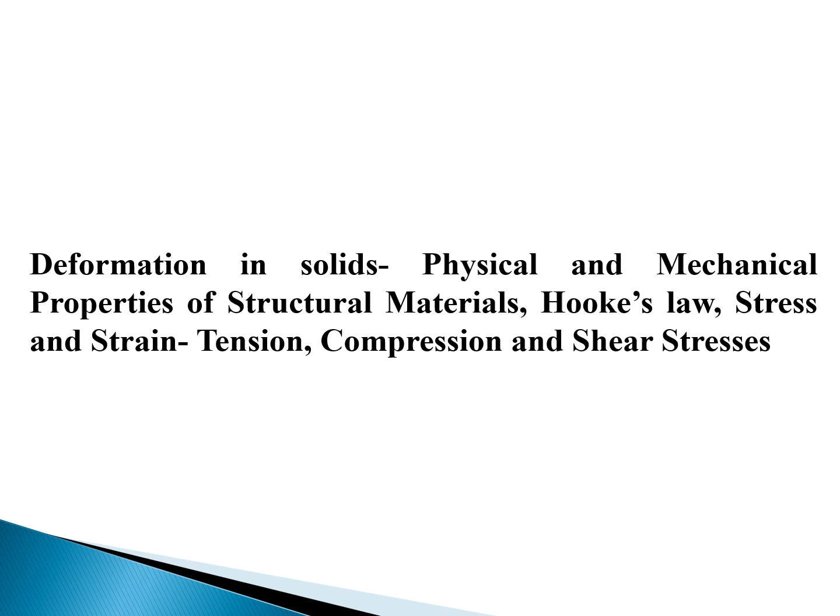In this chapter, we will discuss deformation in solids, physical and mechanical properties of structural materials, Hooke's law, stress and strain, tension, compression, and shear stresses. An engineer must know the required properties for his products. Various properties of materials may be grouped into A, physical properties, and B, mechanical properties.

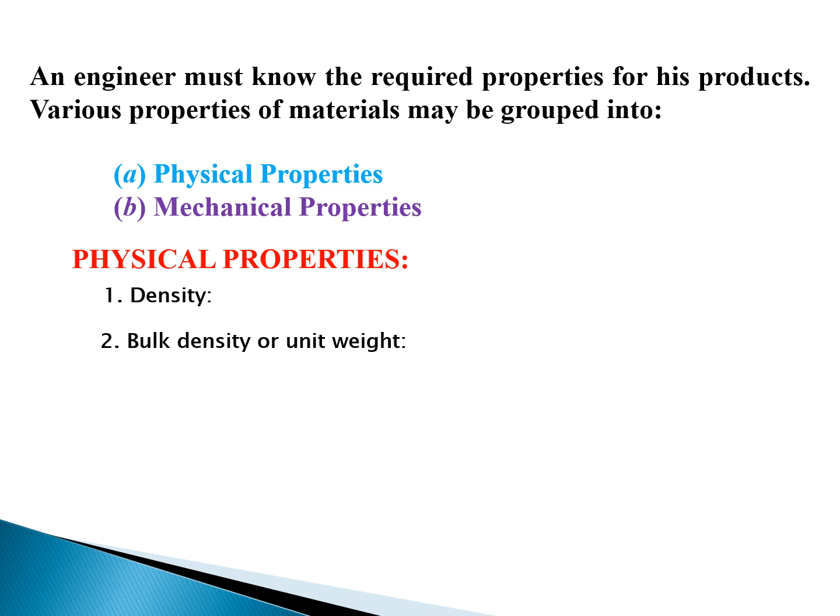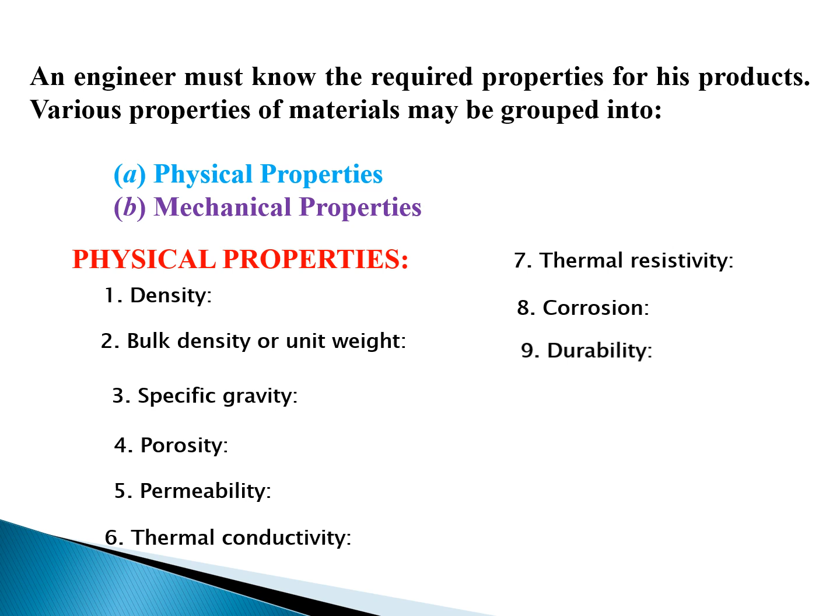Now, physical properties: number 1, density, the bulk density or unit weight, specific gravity and porosity, permeability and thermal conductivity. Seventh one is thermal resistivity. Next one is corrosion, durability and chemical resistivity.

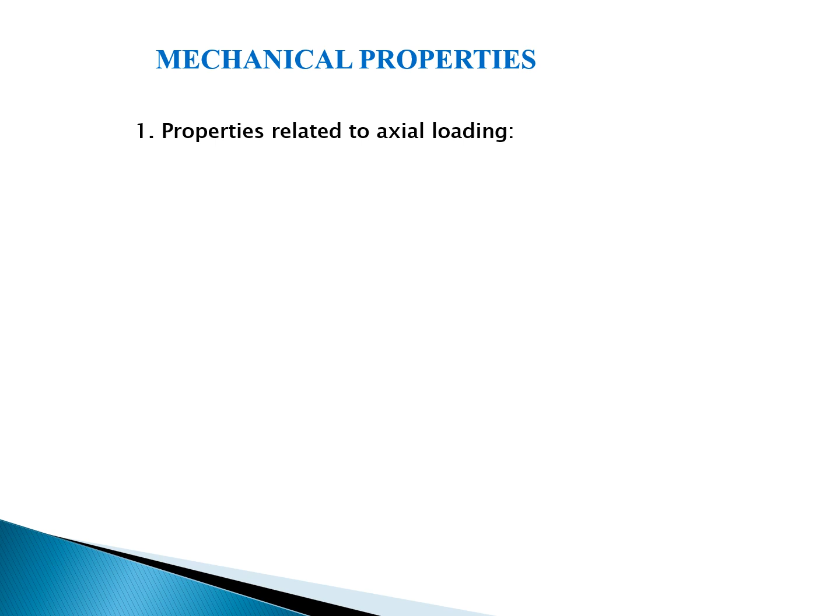Next, the mechanical properties. What are the mechanical properties? Number 1, properties related to axial loading. In axial loading, the load may be tensile load or compressive load. In the case of tensile loading, the strength is the tensile strength. So what is tensile strength?

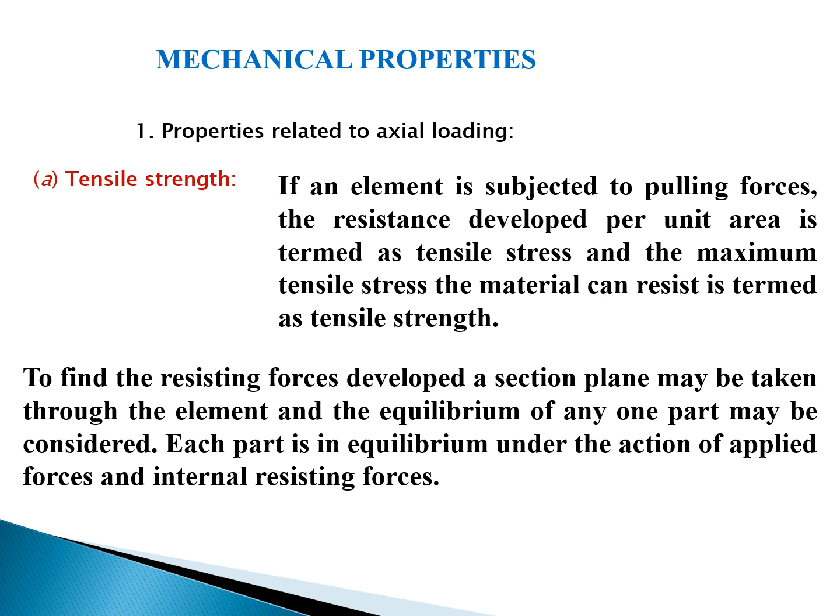If an element is subjected to a pulling force, the resistance developed per unit area is termed as tensile stress, and the maximum tensile stress the material can resist is termed as tensile strength. To find the resisting forces developed, a section plane may be taken through the element and the equilibrium of any one part may be considered. Each part is in equilibrium under the action of applied forces and internal resisting forces.

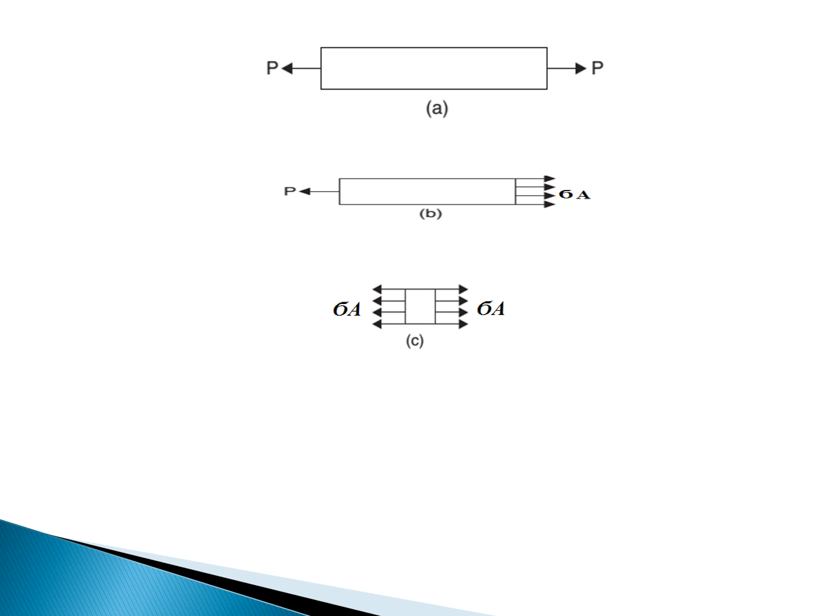Now let us discuss this slide. Picture A shows a pulling force P applied on an element, and picture B shows the section, with sigma A on the right hand part, and similarly sigma A on the other. So the total force on this element is sigma into A. Sigma here is the tensile stress.

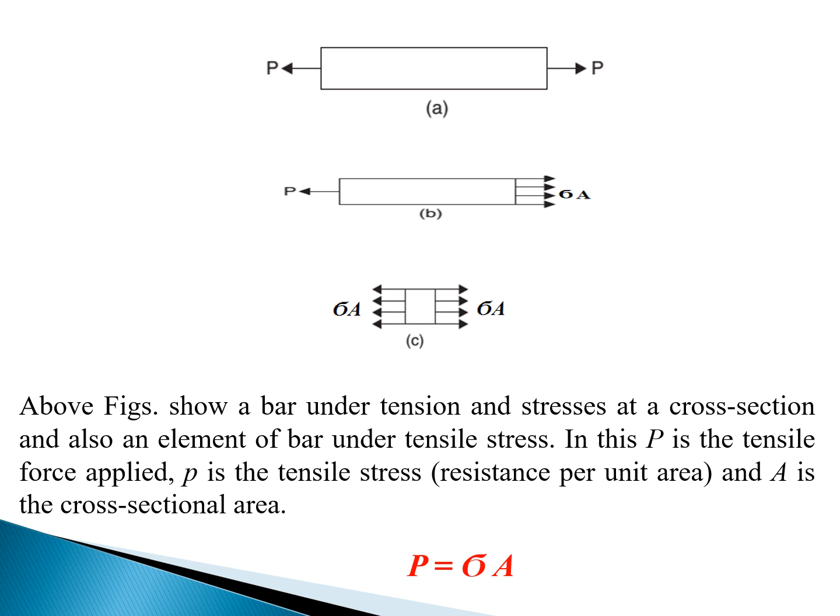The figure shows the bar under tension and stresses at a cross section, and also an element of the bar under tensile stress. P is the tensile force, small p is the tensile stress, that is sigma, the resistance per unit area, and A is the cross sectional area. Tensile stress is denoted by the symbol sigma or small p. So finally capital P equals tensile stress sigma into A.

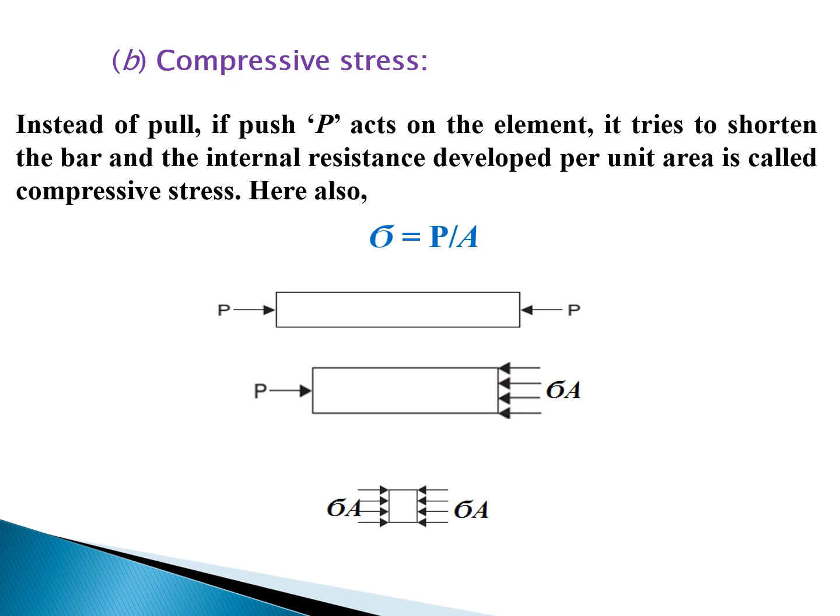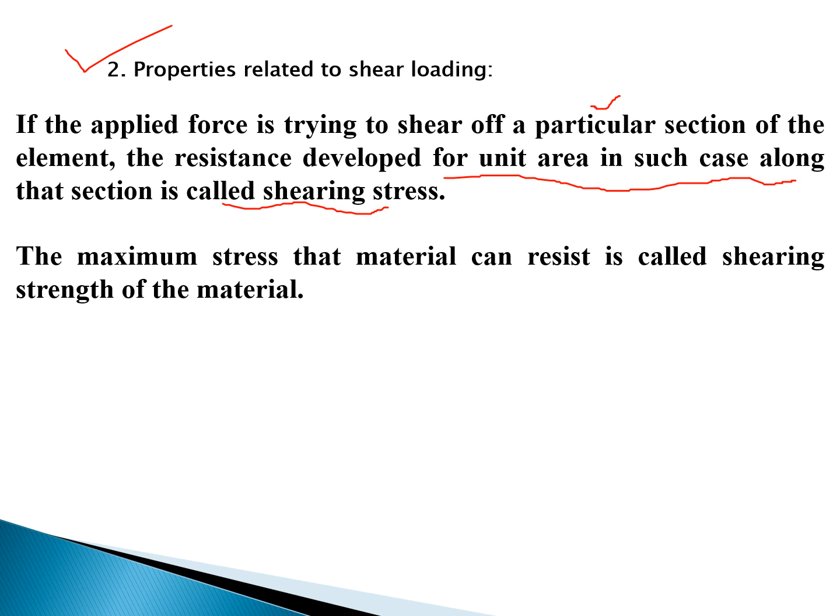Now if the applied force is trying to shear off a particular section of the element, the resistance developed per unit area along the section is called the shearing stress. The maximum stress that the material can resist is called the shearing strength of the material. This picture clears the view.

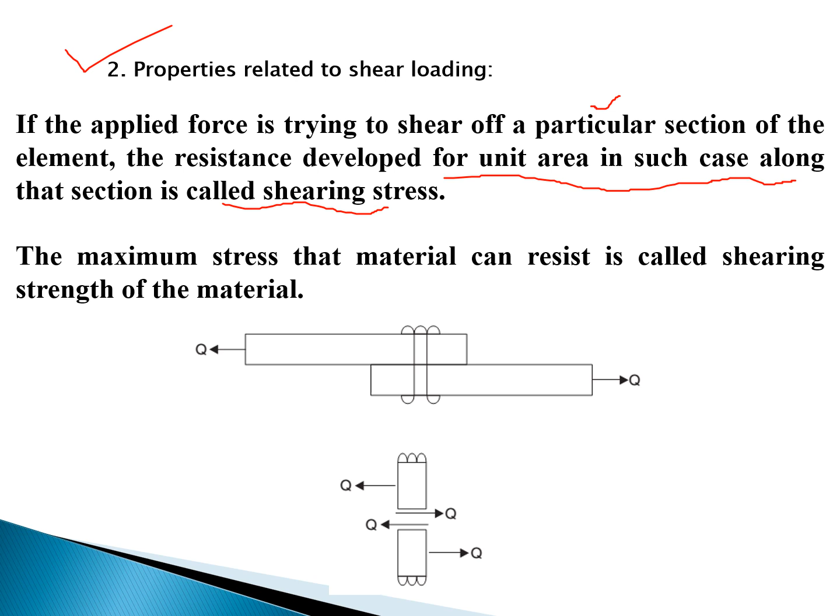Here Q is the shearing force. If Q is the shear force and tau is the shear stress, then the equilibrium condition of any part considered shows that Q equals tau A, where A is the cross-sectional area of the bolt, and tau, the shear stress, equals Q by A.

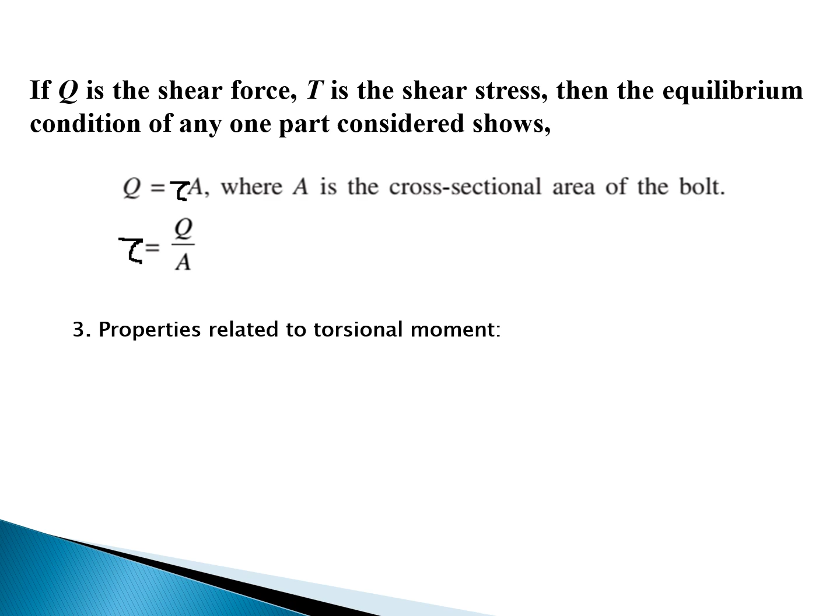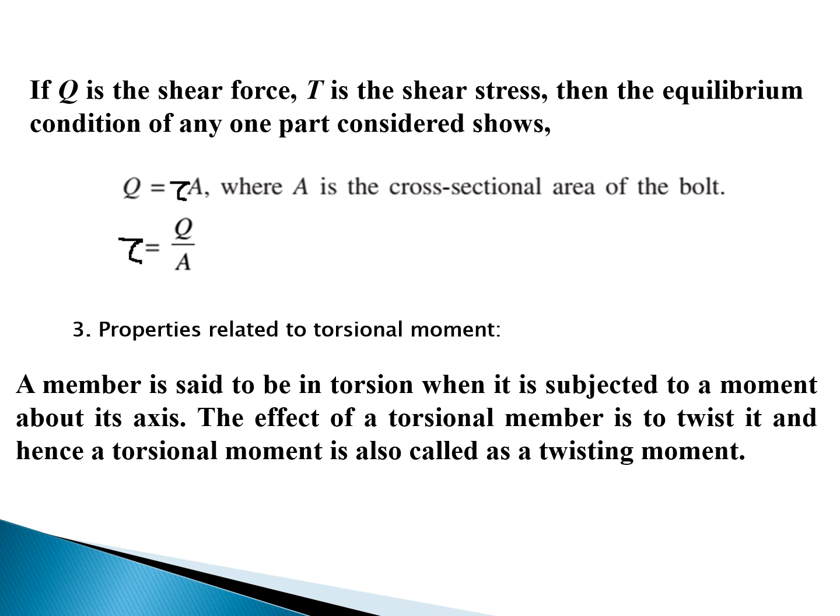The next one is properties related to torsional moment. A member is said to be in torsion when it is subjected to a moment about its axis. The effect of a torsional moment is to twist the member, and hence a torsional moment is also called the twisting moment. In this diagram, the torsional moment is called torque, denoted by the symbol T.

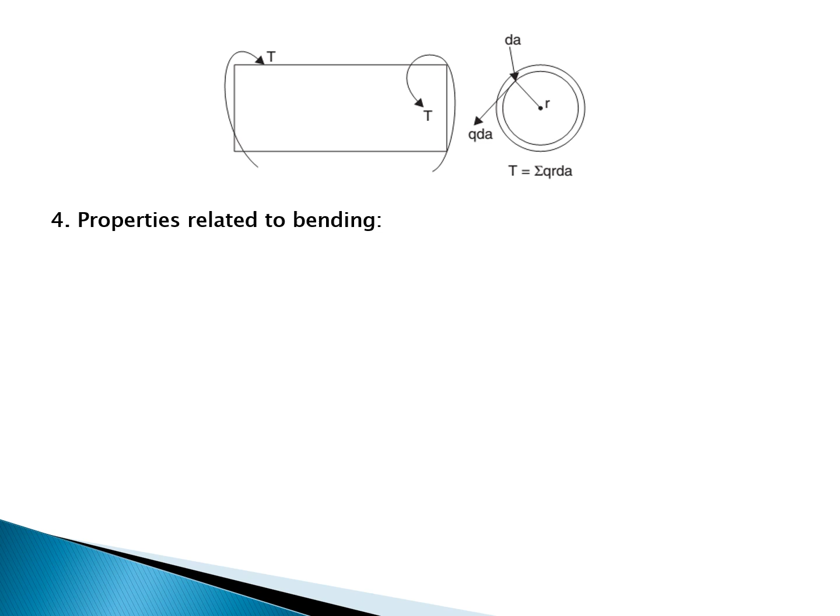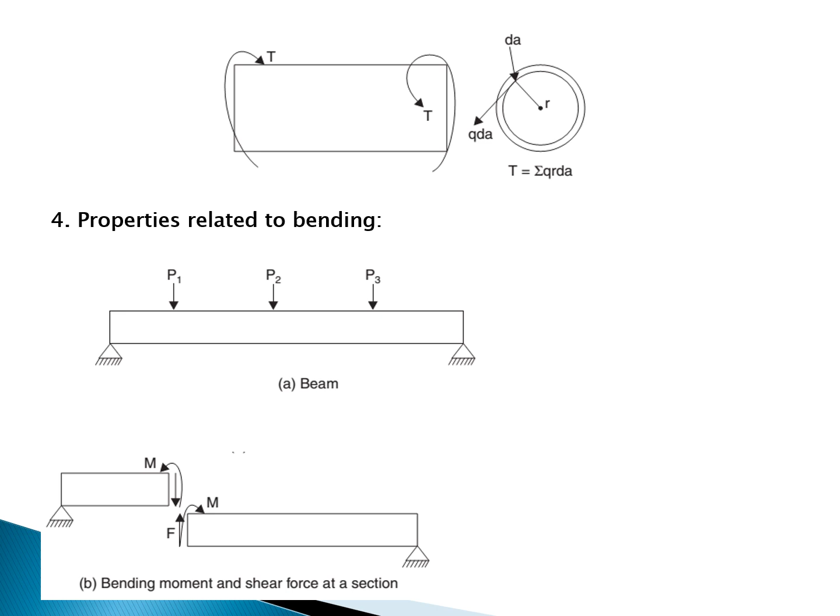Next, properties related to bending. In this diagram, different point loads are applied on a beam. This is the bending, and bending moment and shear force are in diagram B. Now in the case of resistance to shear, there are two arrows, one up and another down. That is the shear force.

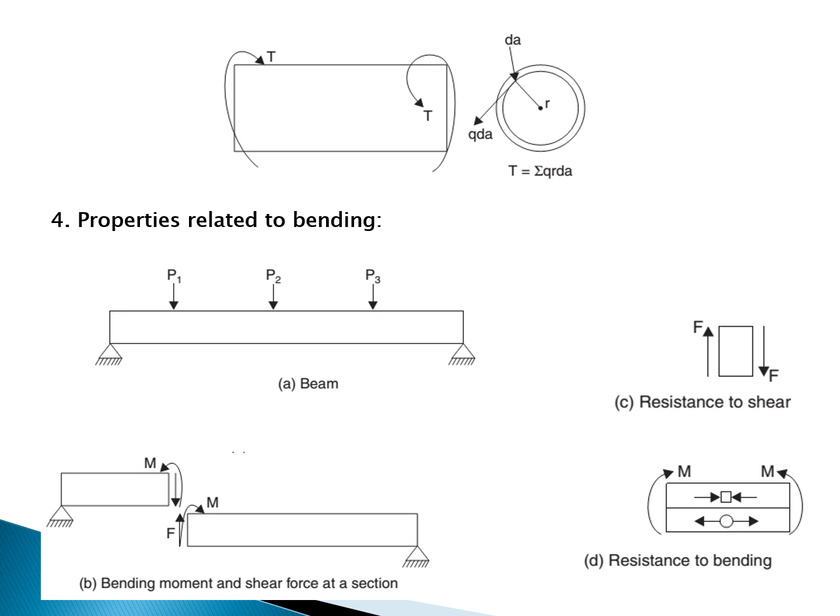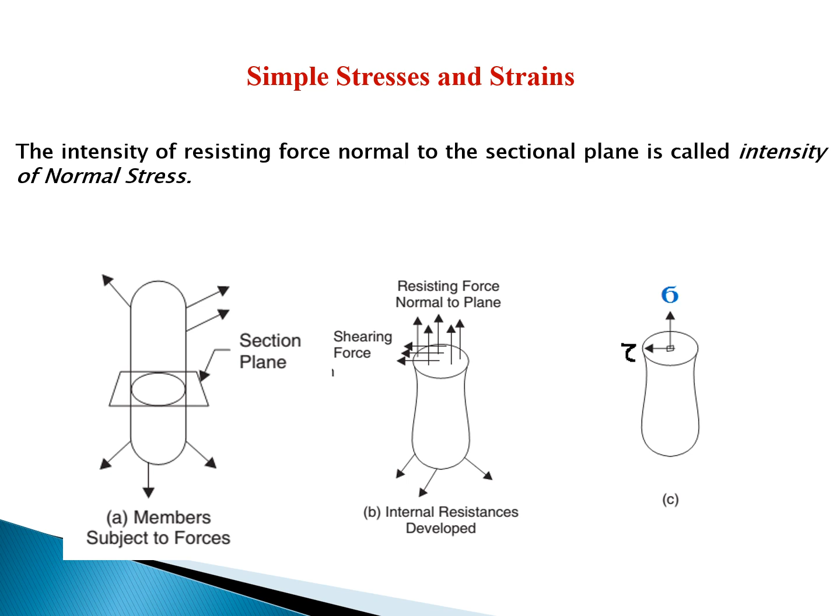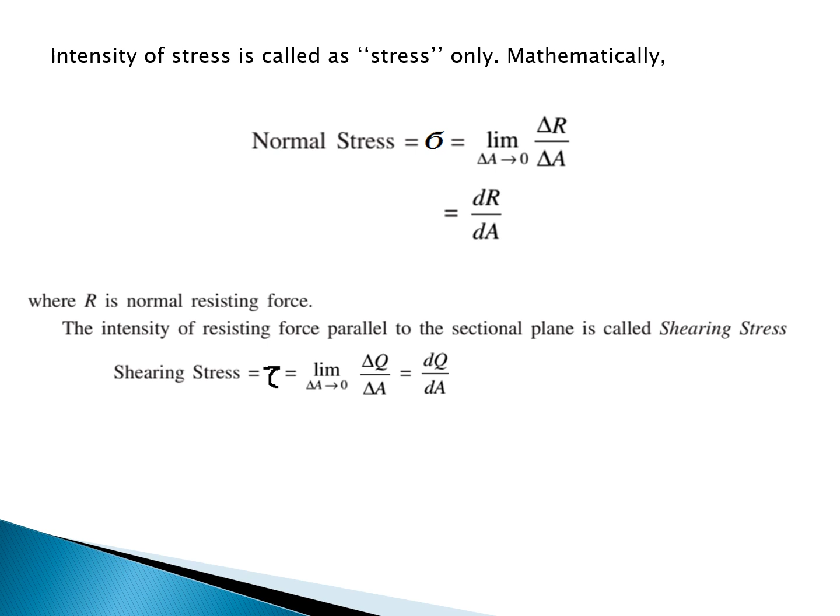Now intensity of stress is simply called stress. So mathematically we can express that sigma equals limit del R by del A, and finally dR by dA, where R is the normal resisting force. The intensity of resisting force parallel to the sectional plane is called the shearing stress. So shear stress can be defined as tau equals dQ by dA, where Q is the shearing resistance.

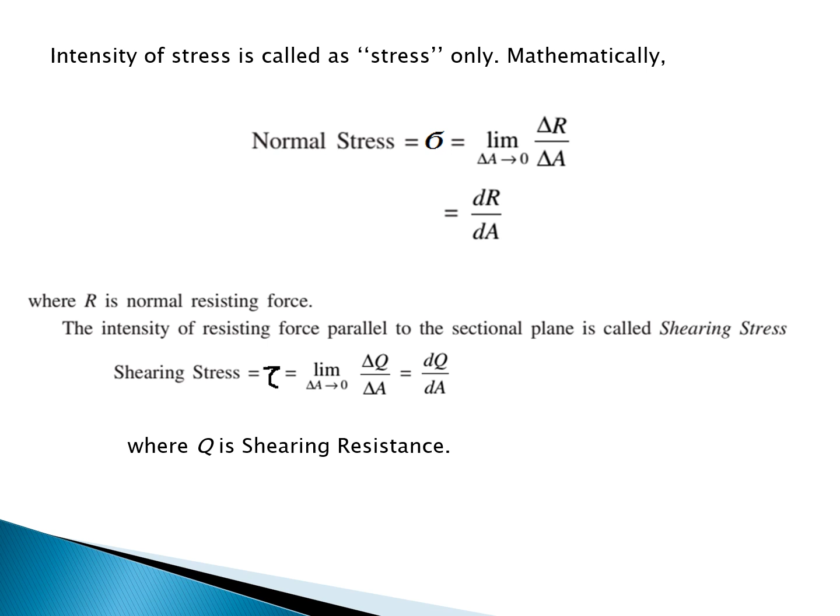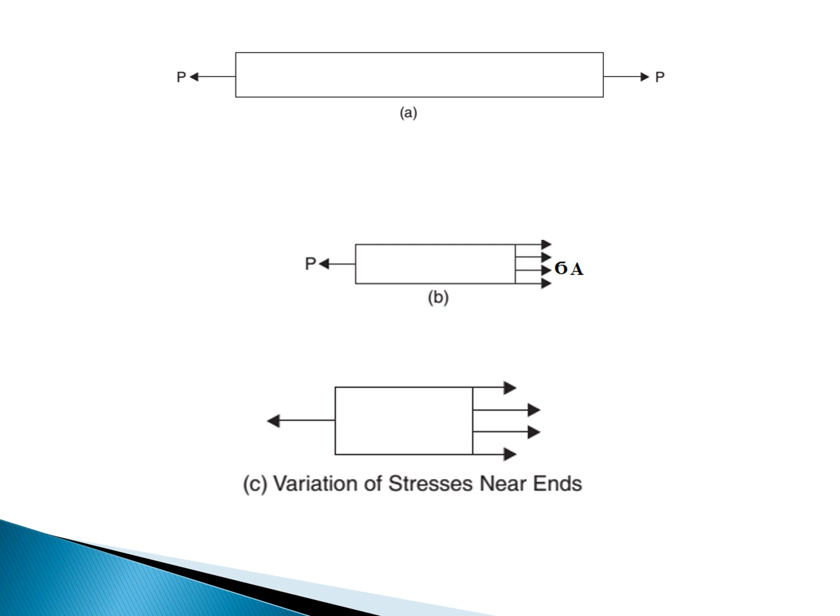Now next question comes, what is the unit of stress? Unit of stress will normally be Newton per millimeter square. The other derived units used in practice are kilonewton per millimeter square, Newton per meter square, kilonewton per meter square, or meganewton per meter square. The stress of 1 Newton per meter square is known as Pascal and is represented by Pa. That means Pascal is nothing but Newton per meter square.

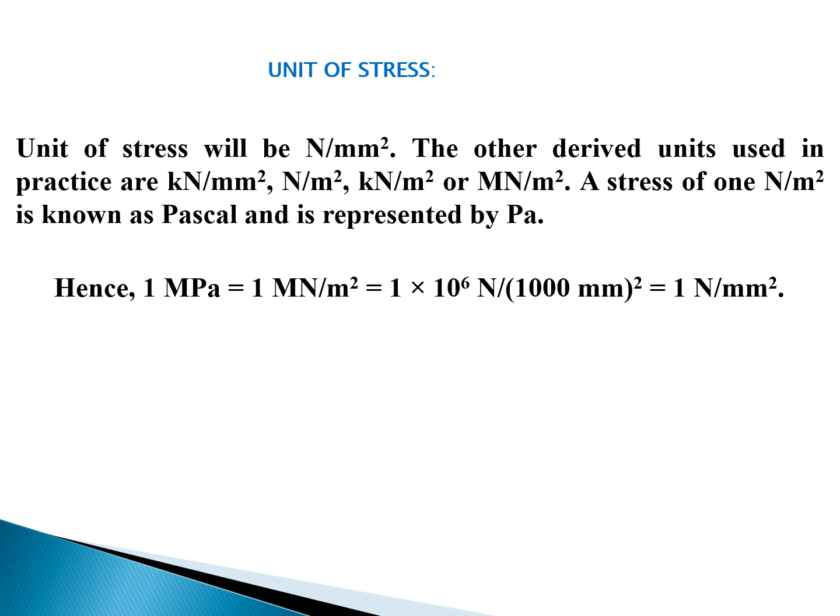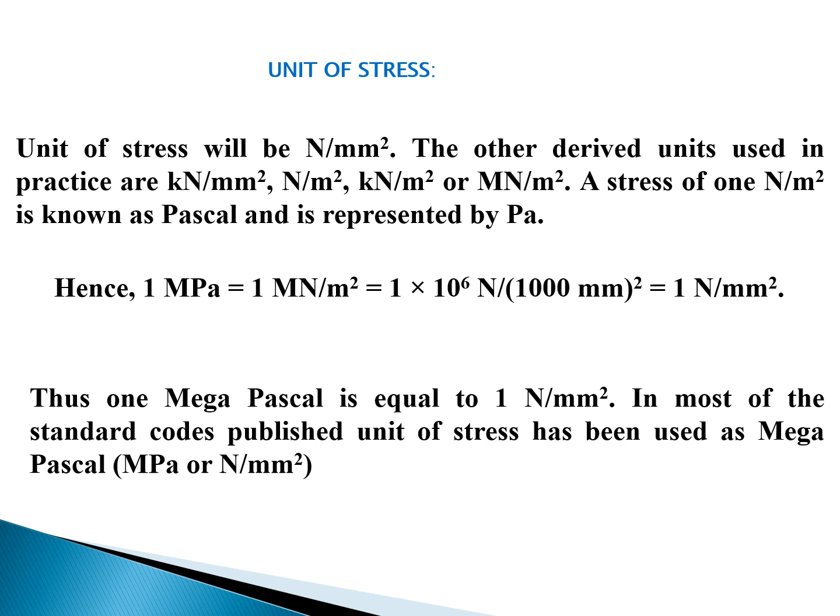So this is the conversion. So 1 megapascal equals 1 meganewton per meter square equals 1 into 10 to the power 6 Newton per 1000 millimeter square, finally 1 Newton per millimeter square. Thus 1 megapascal is equal to 1 Newton per millimeter square. In most of the standard codes published, unit of stress has been used as megapascal, that is MPa, or Newton per millimeter square.

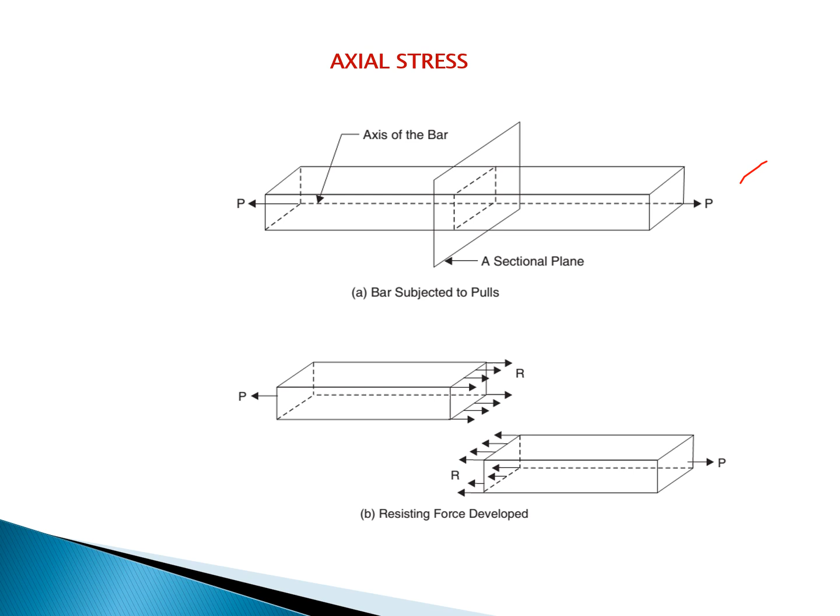Now the axial stress. So if you see the diagram, the axial stress is nothing but the stress acting along its axis. Figure A, the bar subjected to pull. Figure B, that is the resisting force developed. So this is especially for the tensile stress.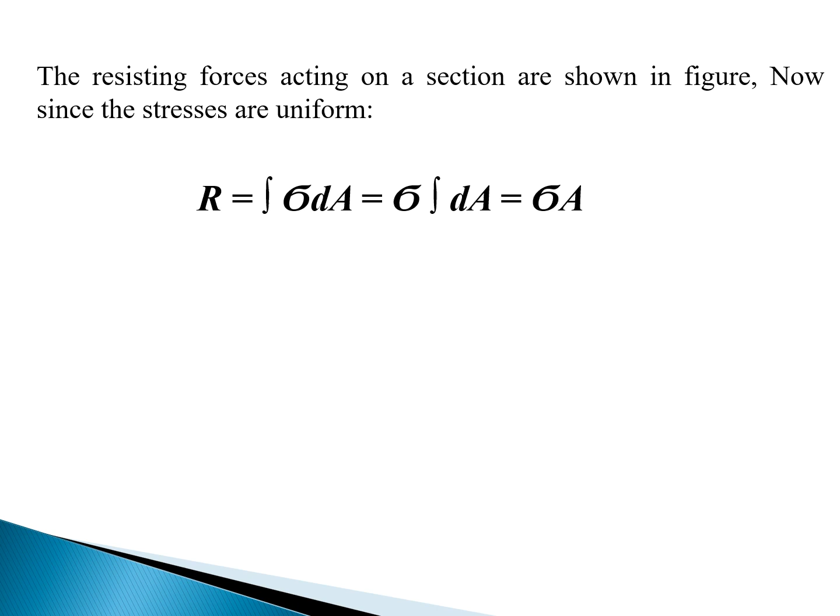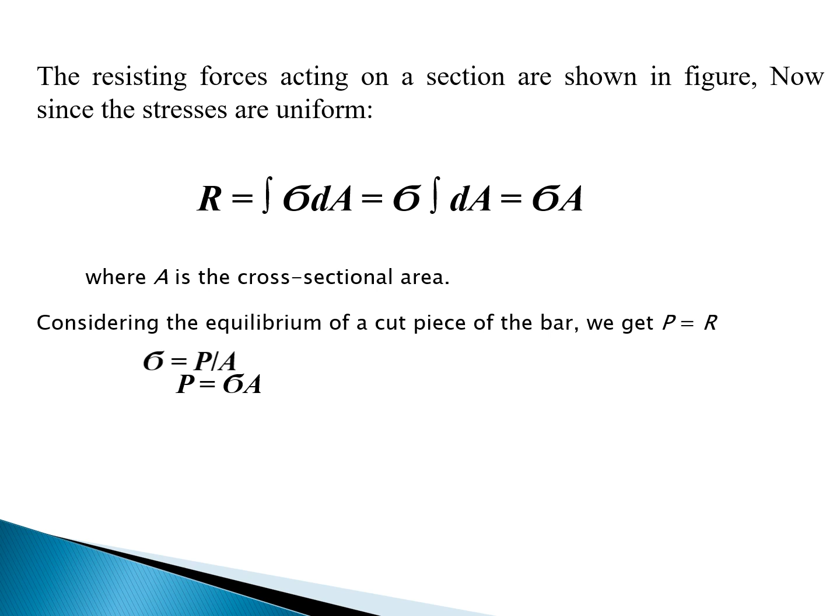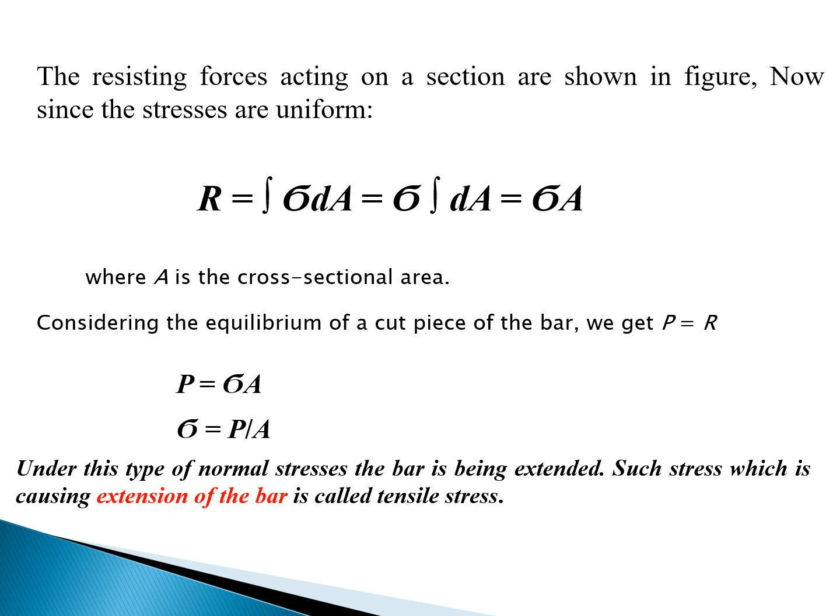Now the resisting forces acting on the section are shown in the figure. Since these stresses are uniform, the resisting force is nothing but equal to sigma into A, where A is the cross sectional area and sigma is the stress. So P is nothing but sigma A. So sigma equals P by A. So under this type of normal stress, the bar is being extended. Such stress which is causing extension of the bar is called the tensile stress. That means due to the stress, the bar will be extended.

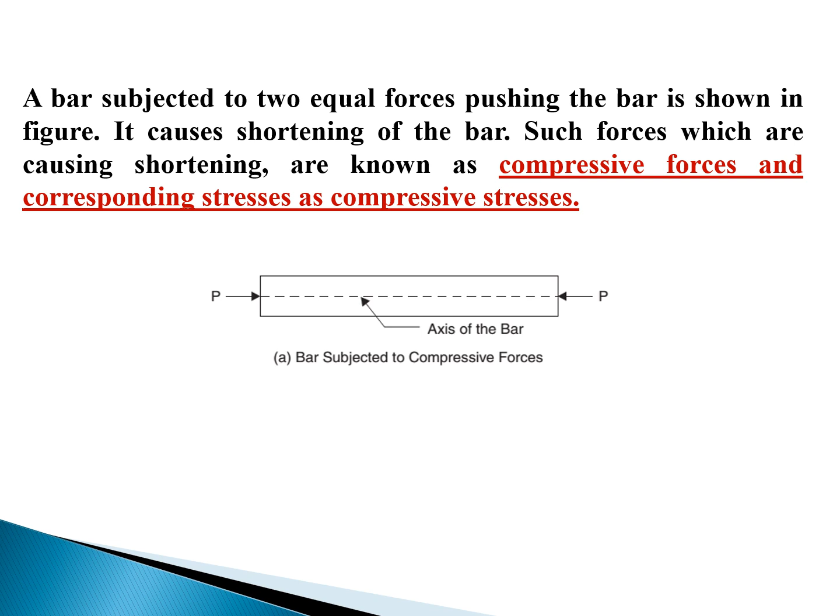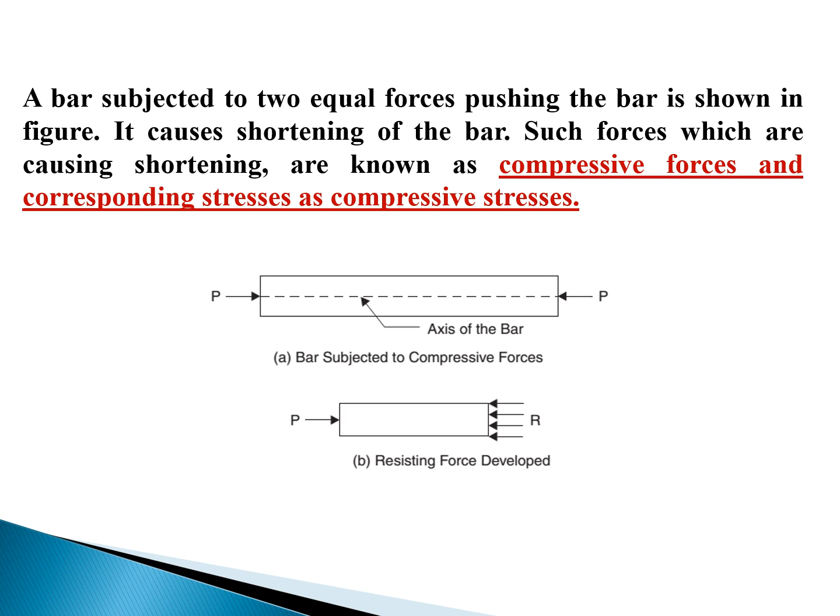A bar subjected to equal forces pushing the bar is shown in the figure. It causes shortening of the bar. Such forces which are causing shortening are known as compressive forces, and the corresponding stress is compressive stress. So this is the diagram of compressive stress as well as compressive force.

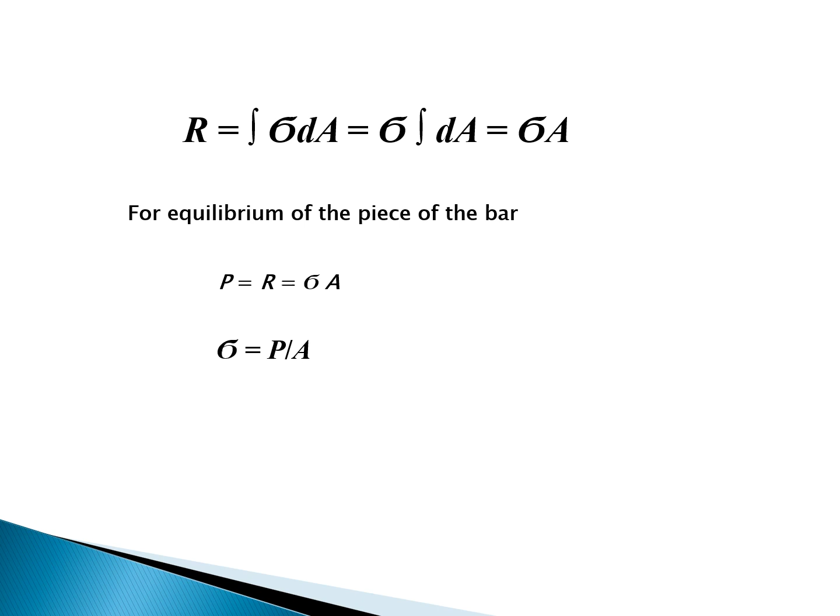So this is the resistance, and for equilibrium, P is the force, R is the resistance. So you can write that P equals R equals sigma A. So sigma equals P by A. Thus whether it is tensile or compressive, the stress developed in a bar subjected to axial force is equal to the load per unit area.

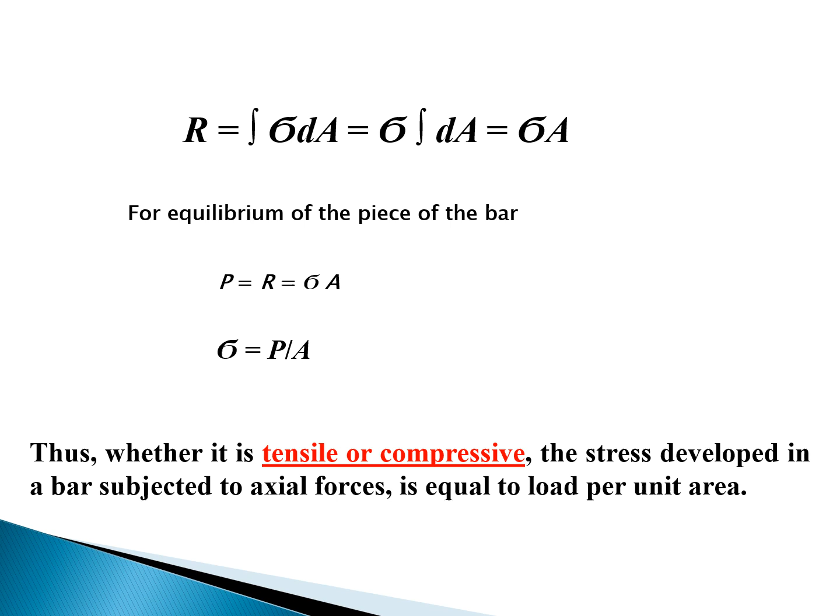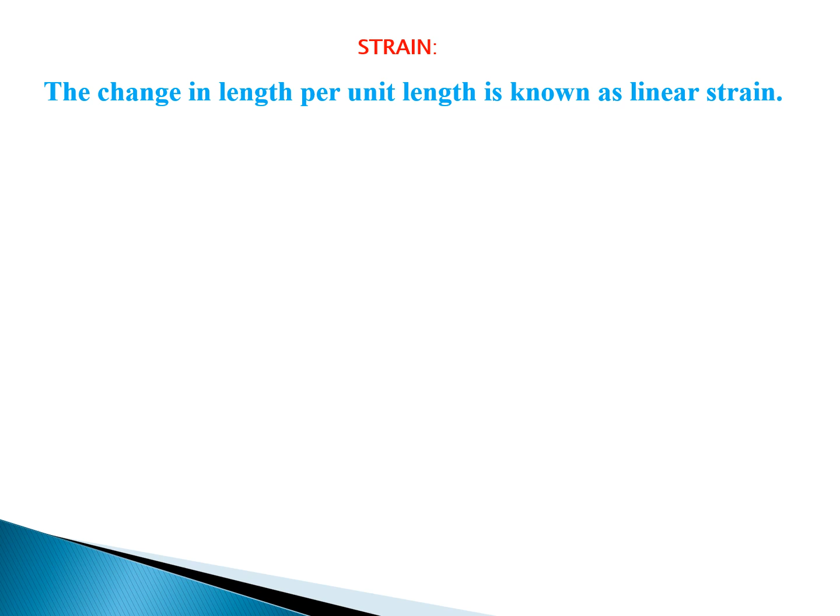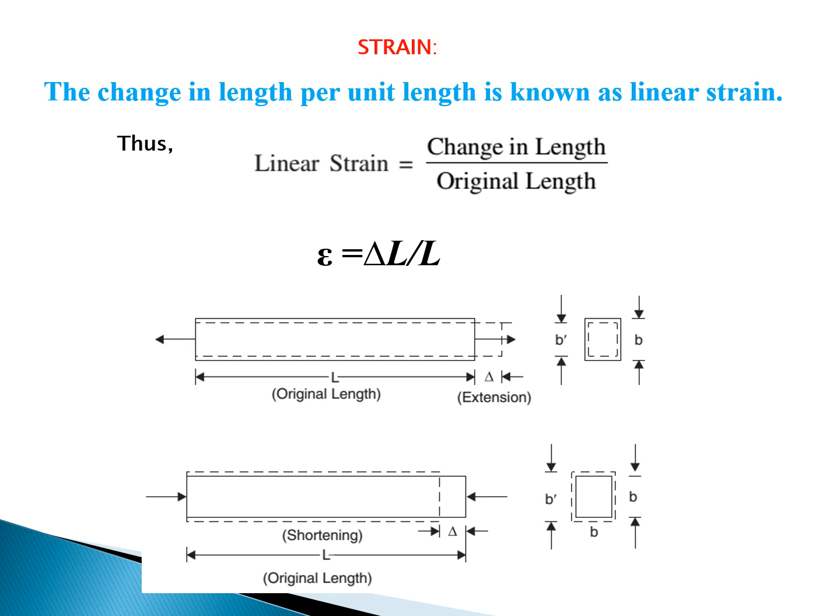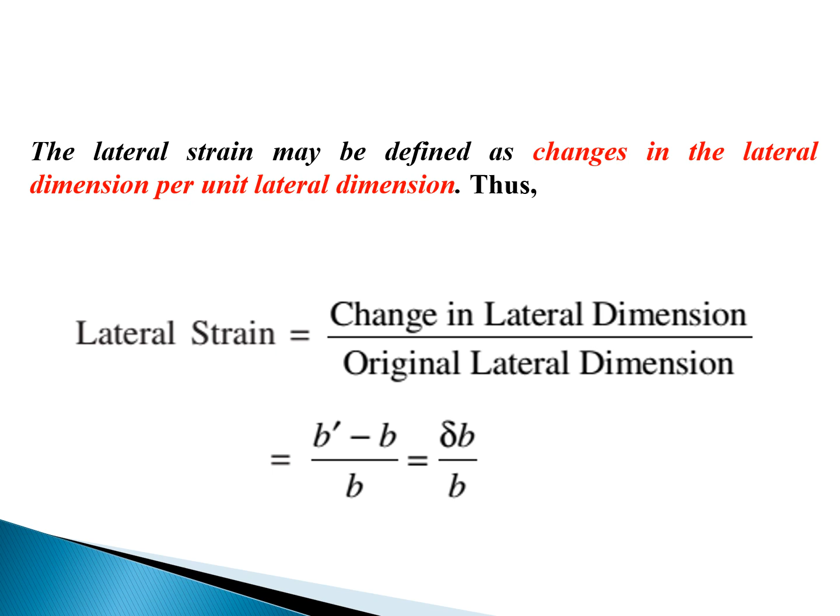Now the lateral strain may be defined as change in lateral dimension per unit lateral dimension. So lateral strain can be defined as change in lateral dimension by original lateral dimension. So here it is B dash minus B by B. B is the original dimension, and B dash minus B is the change in dimension.